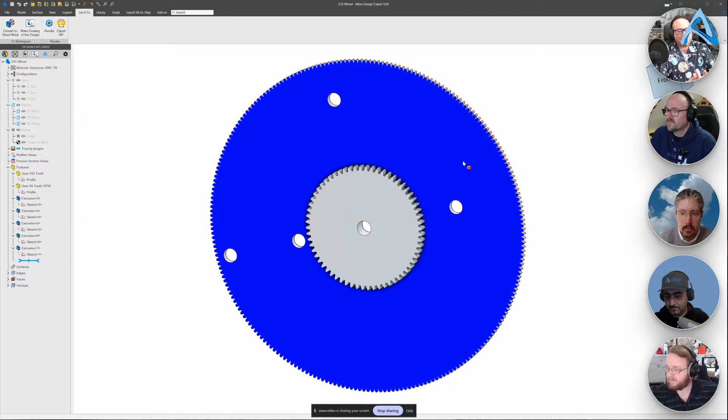Now, I had an issue in the last stream because right as we were closing down, a perfectly beautiful question came in, and I was unable to have the time to answer it. I promised I would open the stream with this question. So I'm going to share my screen and we can run through it. Here I've got a gear, and the question was, how can I show weight in drawings?

So I'm going to send this over to a drawing. And as this opens up, the weight may come in an unlikely place. So I'm going to insert a view of my gear, and then we'll actually go to the bill of materials, and I'll insert a standard template. Now, it may seem kind of strange to have a bill of materials for one item, but stay with me here. If I double click on this, we can bring up our bill of materials editor.

Over here, I can right click and choose column and insert, or just go to add column. I'll hit this X and remove everything. Then when I go to my properties, under design properties, there I have my weight. So I can add that as a column, and it comes in beautifully. Then I can just add this, maybe implement it right into my bill of materials. I can also specify with a new name, maybe we'll add in kilograms or whatever your preferred unit is.

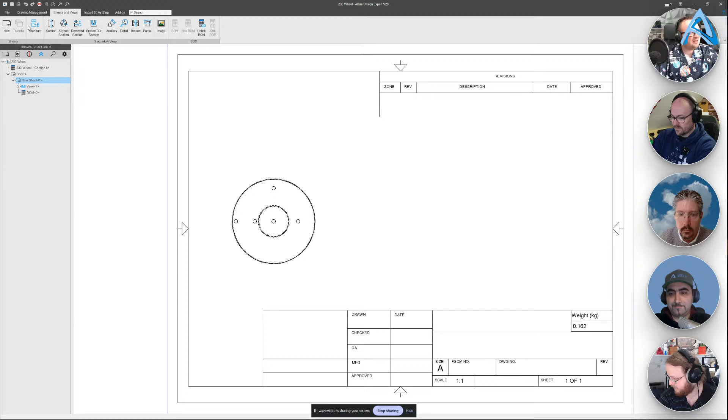Now the question is, what if I want to change something? So I'll go ahead and save this into my PDM, and then we'll say edit our 3D model. So if we need to change the material, right now we have 6061. I don't know, Chris, is that one of your favorite materials? It's not bad, it's easy to machine, that's for sure. Maybe we'll make a brass gear. If we apply that...

And save the changes, when we go back to our drawing environment here, I'll start reprojecting things, and sure enough, our weight updates. So we do have a linked updating weight. And actually, the Alibre logo is blocking my beautiful face here, so I'm going to get rid of that for a sec.

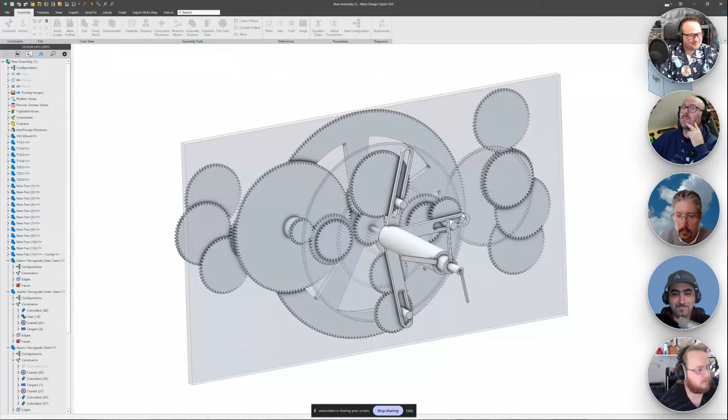What if we have an assembly and we want to do this? So just a few finer points for working in an assembly. I'll pull up my in-progress gear assembly. It's kind of half modeled right now, but you can get the idea. Lots of gears turning as we're loading this up. So have this interesting assembly. I'll go ahead and make sure that I send the most updated version to a drawing environment. How do we keep track of weights in assemblies?

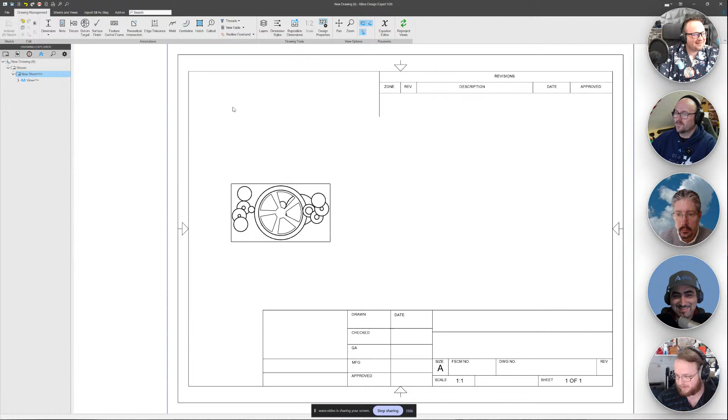That's awesome. Not to be a stickler, but if we're working in kilograms, is that not the mass of the part instead of the weight? I love it. Yep. Thank you very much, Adam. I could be completely wrong. I am out of date on my physics, but sounds about right to me. I'm way out of school. I've got zero knowledge now on anything.

I was in a previous conversation with Adam. He said he's not an engineer, right? But I think one of his ancestors is whispering in his ear right now. That is very correct, actually. And it's the same thing about pounds. If you want to be very strict about it, it's kilograms of force as weight, right? But if we're honest, when we call out the weight of a part, we use the wrong word. We want to specify the mass, right?

Yeah. Well, at least that's amazing. That's a comment that guys like me appreciate, Adam. Which is why we don't have many friends.

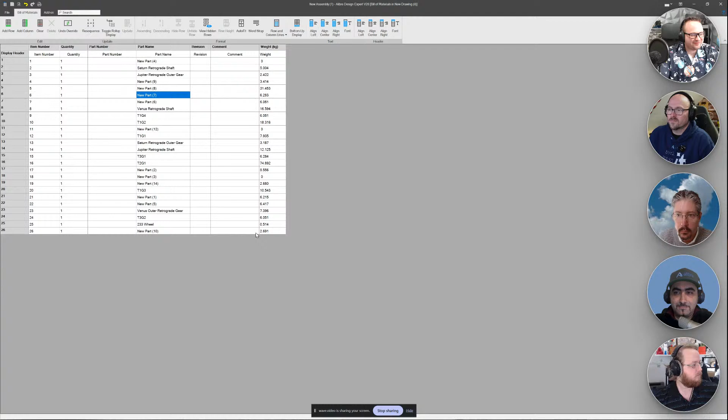So down here, I can right click, and under column, we'll add a summation row for that column. And there is the total weight of our assembly. So easy way to track things. These are updating properties, and sure makes things easy. So that is how we do weight, a little bit different than working through the custom properties like we typically might. So hopefully for the person who asked in the last live stream, that's a great solution.

I think this might be one to do a clip of and post it separately, maybe. Yes, I need to be doing that. I've had a lot of background projects stopping me from doing the videos, but we'll be getting into that too, because that would be a killer clip.

Yep. And can I just say here that this has already been covered by Joseph in an amazing series of videos he did on drawings. This methodology here, and if you need to output any sort of 2D drawing for your parts, you need to watch that series, because I think I knew some stuff and I learned quite a lot. So definitely value there. Well, thank you, Costas. I appreciate it.

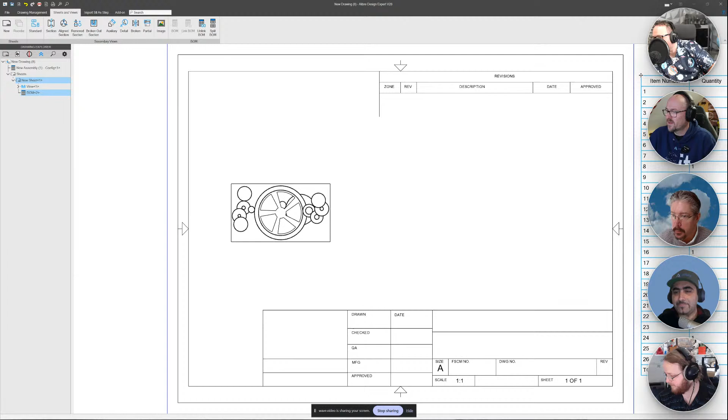What kind of support does EasyCam come with? Okay. Well, we do offer a maintenance program through Alibre where you get a year of support. In that support, you get custom videos as well. So when you have a project and you're getting stuck, we'll work a video around your project so you understand it. If you have two monitors, follow along with that.

I'm always posting something either on YouTube or Facebook. So there's a lot of videos. I'd say there's a couple hundred videos maybe out there. And now we're taking advantage of all those topical videos and placing them in AI. So if you have a question about anything about EasyCam or even Alibre, we added Alibre to the AI as well. So you're off to the races.

We do have PC to PC sharing. So you can log on to my computer, I can log on to your computer, and we'll interact that way real time. So if you have any questions on the phone, I can take over your computer and give you an excellent walkthrough. That's awesome. Thank you so much.

I've got another one here. How do you show center of mass on a part? I can take that one unless someone else is hungry for it. No, I know how to give you the actual location of it in the physical properties, but I don't know how to show it in the part if that's possible. So that's a really good one. Yeah, that's a great question. Thank you for asking it.

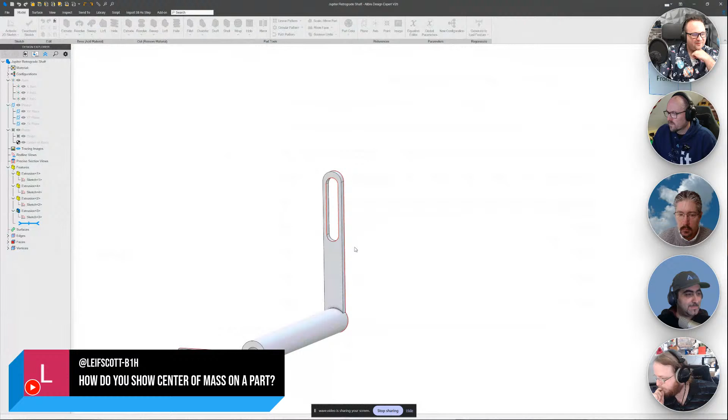I'll grab a kind of odd L-shaped part right here. So in our design properties, we have the center of mass. And I think you need to have the points showing. Oh, thanks, Costas. Yep. So there's our center of mass right there. Just be sure to show your points, folks. Nice and easy. That's a good one. So you can dimension it and all that. So that should work. What else have we got here?

Oh, here's a good one. Does EasyCam have post-processor capabilities to work with small Makera CNC machines? Okay, are we talking lathe or mill? Our post-processor library has hundreds of post-processors available, and they make excellent templates. And again, if we're relying on AI, what would take me hours to do, AI spits out in a minute, and we'll add what you ask it to add to the post-processor, remove it, or rebuild it for you automatically.

I've been developing post-processors for over 25 years now. So in most cases, I can deliver something based on the information that I receive. It can be a quick turnaround. We ask that you send us a sample program that runs your machine. Sometimes we require the manual. Some people take pictures if they don't have a PDF copy of the manual. So yeah, we support anything that has a servo motor attached to it. Maybe 5-axis positioning, not wrapping yet.

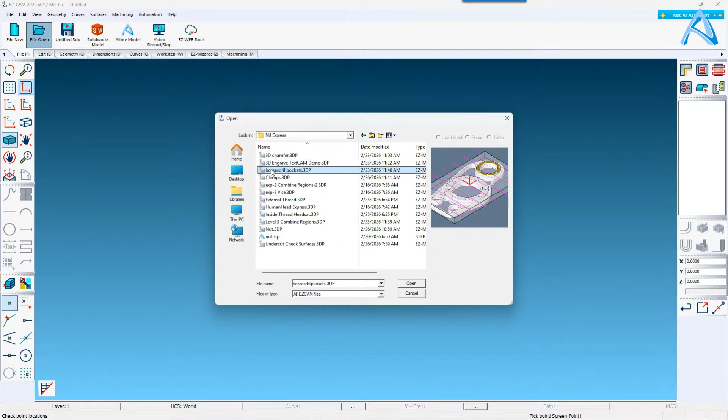Yes. Okay, so here we have our code. Let me process the operations. Oh, thank you.

I think I actually set this up in Alibre as I was learning the product. Beautiful. Alibre was just so intuitive. I'll tell you, I could jump on it. I mean, I'm not a professional by any stretch of the means, but I was able to follow it and make something like this pretty much the second day.

All right. So now we go to post process, right? And let's bring this box over. There you go. FANUC post processors. Oh my God. Okay, so I'm going to go to this. Yeah, they can be. So I'm going to go in here into the post processor itself.

Now look, this is our legacy code for building the post processor. You can see we're adding coolant here. We're adding speed and spindle direction. So this is basic. It's not very powerful. So I'm going to go into AI. Let's open up AI. Where did I put it?

Drag this over. Now that's my active post processor. Let's get this back over here. And I'm going to load it. There's load the post processor. Edit post processor is up at the top. And it automatically uploaded the CNC file, which is all the data, all in one file.

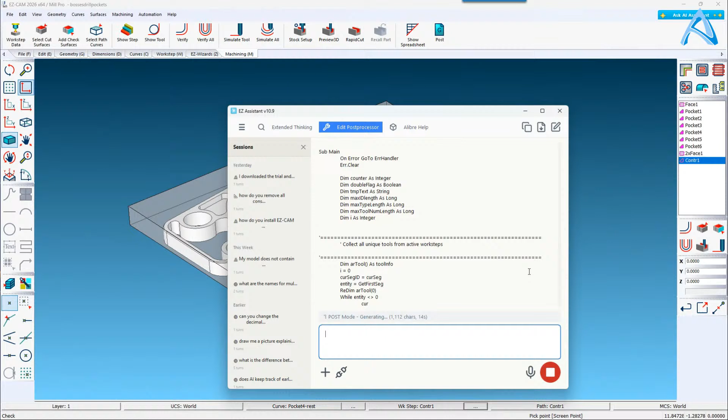Sure thing. CIMCO requires a setup of your stock. It requires tool lengths, tool diameters in order to get it right. So you would have to build a library. Well, in essence, what AI is doing for me is building all the background information that makes CIMCO simulation work. It's all being generated here.

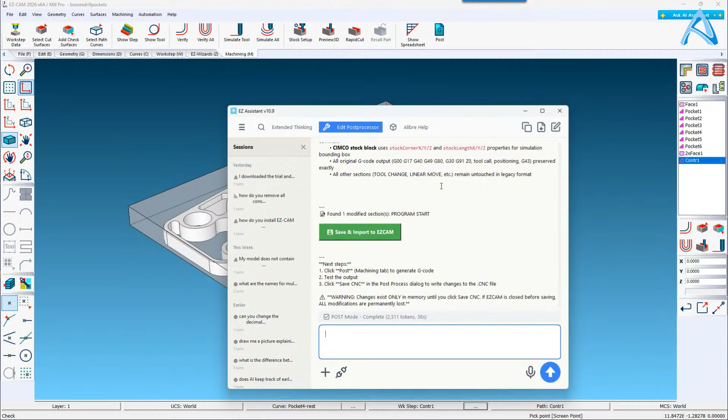Now we had the legacy code, and now we're building, it's called WinBasic. We're building basic code, and it says save and import to EZCAM. So I made all the changes. Oh, man, come on. Yeah, I know this would take me hours to do. So now we're going. Let's see. All right. Let's post it.

It's walking through my operations. Let me just drag CIMCO over onto the main screen here. Okay, so that was the legacy. I may have missed a step here. Let's see. Let me remove that. I apologize here.

That's okay. Doing everything live always gets you. Yeah, you know. Great new tool. I mean, this is recent. This is something that we just had developed. Our developer is outstanding. What he can do just blows my mind.

So let me get here in training, upload the FANUC post processor. I'm going to post it in regular code. And it's going through the strategies. I see that. Nice. Right. Okay. So pause.

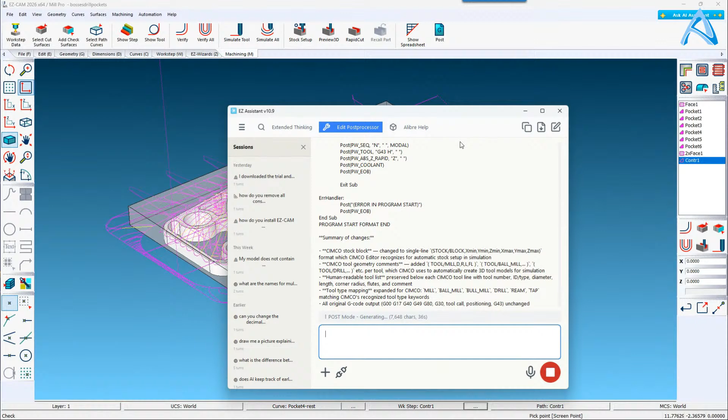So not only are you getting the answers that you're looking for in writing, but you're also going to visualize it as well. That's pretty cool. All right, so now we have save and import to EZCAM. It says one modification and the program start. So it changed just the program start. It's telling me it didn't do it anywhere else. And then we'll save it.

Yes. Now it tells me, it walks me through. So after that happened, it says click post to generate the G code to test the output. Then we click save CNC so it's permanent. So we'll go to post. Why is it not? We're selecting the correct post.

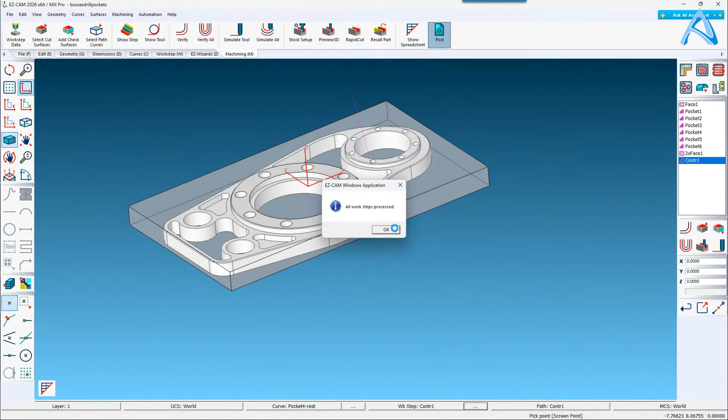And guys, this is the joys of CNC, right? This is pretty standard stuff. Now, anyone who doesn't miss a step here and there is not live. It should have been. But let me eliminate the other one. I apologize. This is just the joy of doing everything live. Right. 100%. Yep. Well, I did it just before we came on, and of course, the second time. What is it? Three times a charm here. Yeah. Hopefully that's not the case. Every machine shop goes through this. So. Yep.

Let me just clear the conversation. Post mode. I'm on post editor mode. This sends up and attaches the current post processor from EZ-CAM.

Now, Chris, I've got a few other questions I can hit if you want to work on this in the background. Yeah, please. Why don't we do that to keep a nice even flow, and then I'll just go, Yahoo! We did it. First try. Well, that's a great one. Yes, this one is a little bit less asked about, but I really wanted to get to it if I can find it here. It's about educational licenses. Let me hunt down in the comments. I just saw it. Right here, I got it. Thanks, Adam. Adam's the hero that saves us all.

Do you have any plans to offer education-based licenses, college and K through 12? I think if you're looking for something big, contact help@libre.com and hello@libre.com. Send an email there if you're a school. We also have $100 for Pro and $200 for Expert with a valid student ID. So keep that in mind if you are in the educational sphere.

I also have one. Will AI be part of a permanent license, or do you have to be under maintenance to make use of that? I think that's for EZ-CAM, when you have a second, Chris. Oh, what was the question again? I'm working through this. Will AI be part of a permanent license, or do you have to be under maintenance to make use of it? No, it's going to be available to those that are trying the software. Perfect. We don't want to leave anybody in the dark.

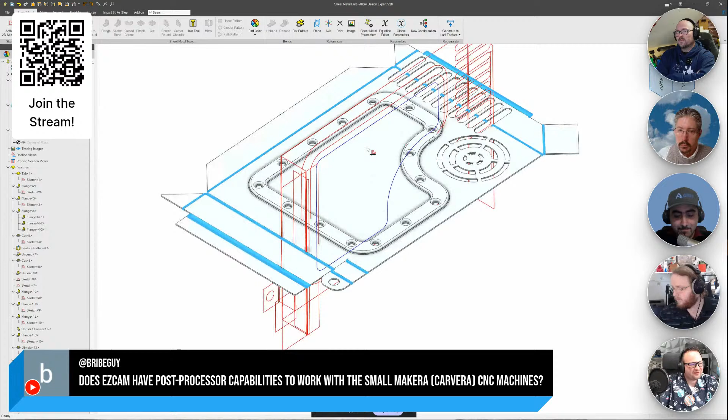So we have a flat pattern that we can flatten out, and then you'll see that our stamped area stays, because generally when you do something forming, you do that first and then cut out your blank for sheet metal bending. But how do we calculate the lengths? Because different materials are going to have different bends and stretching when you go to bend things. So we use K factor.

Let's go with adding a flange here. Now, when I go to add this flange, I can go to advanced over here and see that we have K factor, and we have a built-in K factor value for whatever material that we want to use. Under bend allowance options here, we also have unfold lengths, so we can set it that way as well.

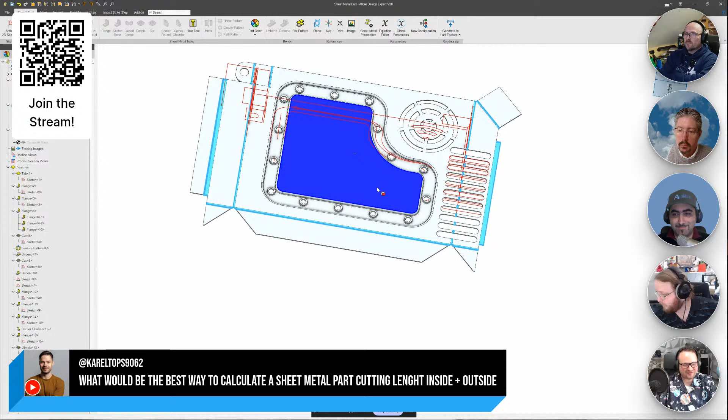But then when we go to flatten things out, those bends and stretches are built into our flat pattern, and that would be the approach that I'd say we use to calculate sheet metal part cutting lengths. Hopefully that answers the question. I haven't been a career sheet metal guy. I've only used it a few times in the field, so maybe there's more to that question, but that would be my short answer on that. Let me know if I hit it or not.

I'll second the comment. There's nothing AI about Steve's channel. In fact, I've watched him fix headphones live on the air. That was my favorite live stream moment, because I'm sitting there going, there's no way Steve can fix that circuit board on those headphones, and it worked. And I think you're wearing them right now. So look at that. There you go. But wait a minute. How do we know that Steve is even real? Is he not too good to be true? Maybe he's AI. Sometimes, yep. Sometimes I get into an explanation and Steve says, but what does that mean for a beginner? And I'm like, oh, I'm so glad Steve asked that, because it's easy to get into the fast.

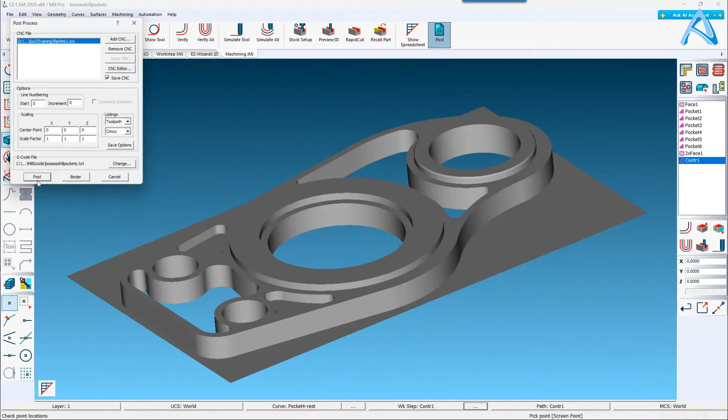Because CIMCO can do some really decent simulation if you have all the data, and doing a post processor that gives the data to CIMCO was a very interesting idea that I hadn't thought of back in the day, and I should have.

Just opening CIMCO now. Then what we're going to do is go to the backplot.

This is so useful, guys. So here's the wireframe. Even that is extremely useful if you know what you're looking for and how to read it.

And if we didn't have the post processor developed for that, you would have to go into your tool setup. Which means making your tool libraries twice, which is not practical, right?

Let me just simulate the stock here. Add stock.

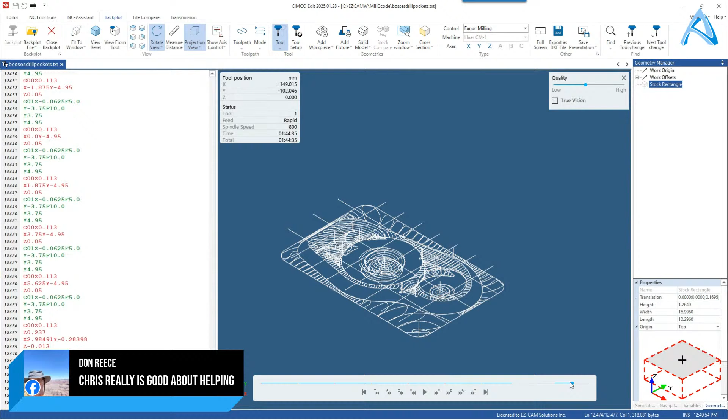And a special thanks to Don Reece. I love that comment, I'll show it one more time. Chris is really good about helping, and I always get quick responses from Chris.

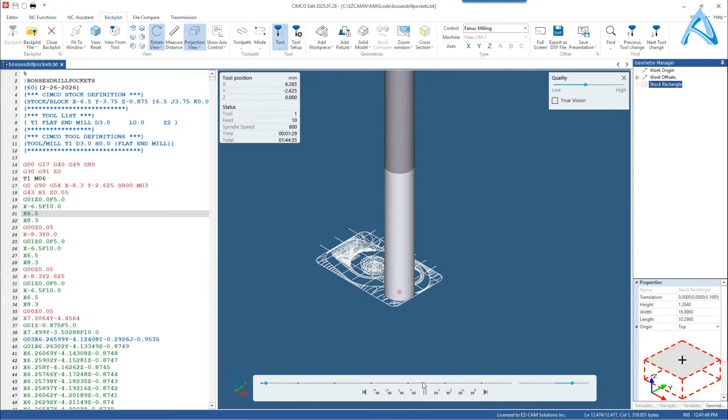Yeah, but isn't it like that? Isn't it amazing that it is like that? It's so paradoxical that those skills to not know what you're talking about is also correlated with competence. It comes back to bite you, doesn't it? Anyway.

The first thing I learn is where do I not put my hand. Next to the big spinny thing that's eating the metal or wood is probably a good start. Start at the basics, you have to bear with me.

If I'm very honest, I don't remember how to set up the stock on CIMCO either. I think if you go to add dimensions, you can give it some dimensions for the stock, but it was supposed to get that out of EZ-CAM. So my fault might be that I have the stock set wrong. Let me go back through it.

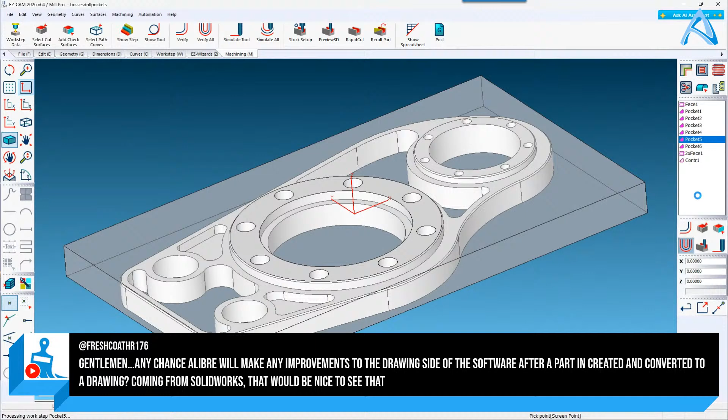As you're going through that, I'll bring up one question that looks pretty good here. Any chance Alibre will make any improvements to the drawing side of the software after the part is created and converted to a drawing? Coming from SolidWorks, that'd be really nice to see.

Yes, I've tracked a lot of drawing requests on the forums as well, and I'd like to see that. I think in V27 or V28 we had some enhancements that were highly requested, and we always want to keep improving that. So don't feel shy about submitting an enhancement request from the home screen of Alibre, and we can get that taken care of for you.

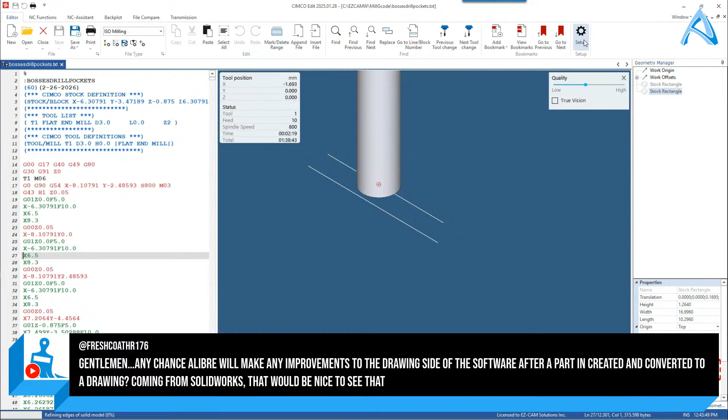Remember, the biggest thing with an enhancement request is to tell them why you want the feature as well, because that perspective helps them add the feature. Adding features without knowing why you want it can sometimes be a bit of a blind battle. They want to know why so they can make it that much better for you. So when you submit a feature request, say this is what I'm looking for and why, this is why I need this feature to use the software.

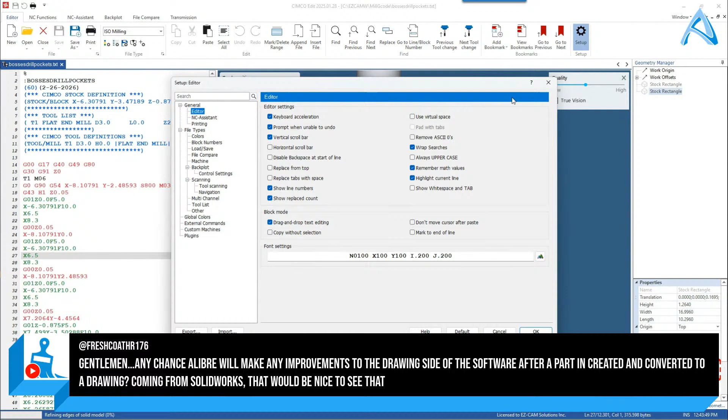Why it helps you - like Max has gone with importing STLs and things. Importing STLs can be used for tons of different reasons. Thanks, Adam, that's a great point, because if we can know, do you want to import an STL just to measure around it, or do you want to import an STL because you want to modify it? Those are two different cases and two different timelines for implementation, and maybe we can get some useful features out.

It's worth mentioning feature requests, because maybe they do add some drawing features and it's not what this guy's looking for or how he wants to use it. Now, Chris, I think I took enough of your time, sorry Chris. I was just saying I quite like the drawing environment in Alibre as it is, but if anybody has got any ideas on how to make it better, by all means.

Sorry, Chris. Sorry, that's not even an EZ-CAM question. I asked, I got a bit carried away, if I'm honest. But yeah,

I remember that it's pretty easy to actually get a block going, but then you need to locate it in CIMCO. So yeah, I'll have to figure that one out. I'm sure it's just something simple.

On EZ-CAM, is it possible to run a Swiss with a thread whirling tool? I'm pretty sure that means a Swiss screw machine. Well, we can support sub spindles, 2 turrets, without the wait codes - that would just have to be manually inserted into the program. We can support B-axis, Y-axis, C-axis, and of course, I'm trying to think of the sub spindle, what that coordinate system would be, but we support, like I said, 2 spindles, 2 turrets, Y-axis and B-axis support. So beyond that, I'm going to have to say not more than that.

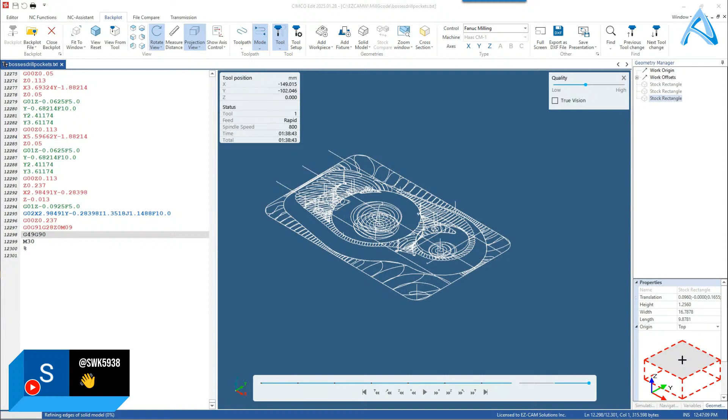So this is another nice question about EZ-CAM - which version would be required for 3 and 4 axis CNC mill work? For 3 and 4 axis CNC work, you're going to want the EZ-Mill or the EZ-Mill Pro. The 3D depends on how complex - if you're dealing with a lot of filleted complex molds, then you're going to want the Pro. You can always start off with the Mill, and within your 1-year support and maintenance, you can pay the difference to get the Pro. The EZ-Mill will support both wrapping and 4-axis wrapping and indexing, so you're covered there. The EZ-Mill Pro goes a little bit further - you can actually machine 3D surfaces on some wrapping.

That's very interesting because we were discussing Fusion, right? And Fusion took their sweet time doing 4-axis anything, and once they made it and had it working, they put it behind a $2,000 a year paywall. So if EZ-Mill Standard can do 4-axis wrapping, that's awesome in my book.

I've been able to cut a decorative post where it was a vine with grapevines, and it would do the rotation and do the corkscrew effect - it would just go through and machine the post. A lot of woodworkers buy our software, and that's one of the types of projects they have. Let's also mention, if people don't know it, that the vanes in a gas turbine - either a power station gas turbine or a jet engine - those little vanes put on the hub are actually 4-axis mill work, not 5 like many people think. They are polished later, of course, but 4-axis wrapping can do some pretty complex stuff. Yep, for sure.

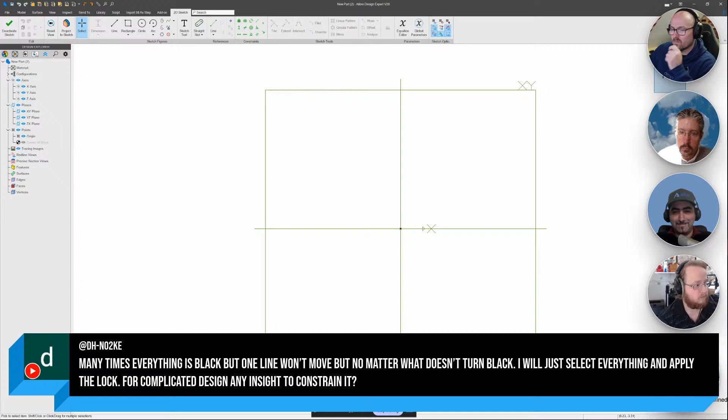And that is an awesome question. So when I make a sketch, it really is about the sketch solver here in my lower right. I better hide that comment so that you can see. In my lower right, I get a little magnitude, position undefined, magnitude defined, position undefined, and fully defined. So we'll go through what those colors mean.

Here, if I make a rectangle and give this a length, this turns orange, as well as this one, because we now know the length. So magnitude is defined, but we don't know the position. I can move this line around, but no matter what I do, the length of the line does not change. Now, if I start adding some dimensions - and this isn't necessarily the best practice of how to dimension something - just to show, this line now turns black because we know where that line belongs and we know how long it must be. And so I think our user is asking...

Sometimes everything is defined, but something doesn't turn black. That happened to me back when I was a career SolidWorks user. It's happened in FreeCAD, Onshape, just about anything I use. This is down to a sketch solver. There are algorithms that determine what the degrees of freedom of sketches are. Sometimes a sketch is applied in a way that is correct, but the algorithm kind of fights it, and so something may not appear fully black.

Often, if I know that my sketch is fully defined, I just ignore it because I know that it's the dimension that I want, and move on. Sometimes, if I really need to troubleshoot something, I can delete some constraints and constrain it in a different way. For example, in this case, maybe instead of having this one right here, I can delete that, or I can delete a vertical and then try to use different constraints to get the same solution. Almost always that clears it, but it is kind of a back-end algorithm, and all platforms have this. It's not a unique thing.

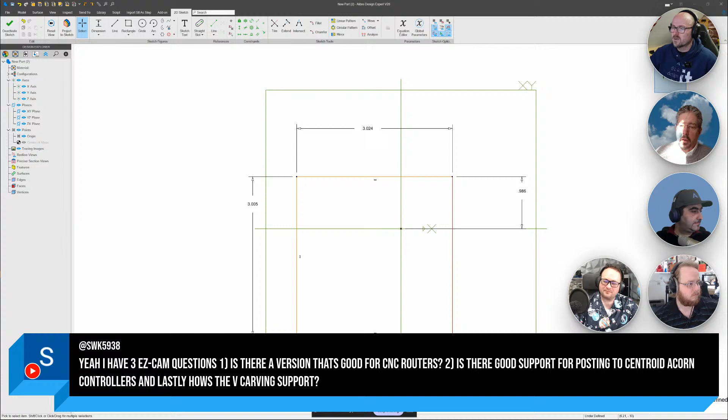Is there a version of EZ-CAM that is good for routers? I'm guessing that's probably more a post-processor question than anything else. Would you say that's fair, Christopher? So with the Centroid, we already have the post processor for the Acorn, and with routers, we support routers all throughout the world, and there won't be any issues. But the version of product that you need, the Mill Express handles some 3D machining.

You don't get a nice uniform toolpath, so sometimes you would have to create and combine strategies. So it's going to take longer to produce the part for a good finish, but you can achieve it in the Express. And the Mill has a wizard that goes along with it, making it easier to walk through. It also has some advanced toolpath for you, not as powerful as the Pro.

The Mill Pro offers, so you know the difference, plunge milling. So if you're going to hog out a lot of material fast, you would use plunge milling. It has pencil milling, it has re-roughing. So if you go in there with a large tool and you want to go back in and get those corners, you don't want to have to manually set those boundaries, going back to curves in order to do that. Exactly. So Mill Pro calculates all of that for you.

It offers a nice uniform step over with our equidistant, so that it doesn't matter what surface slope - if it's a vertical wall, it's going to give you a uniform toolpath throughout. So it's not like the projected toolpath, where with pocketing you get a step over, and coming up against a vertical wall, or let's say there was a slight taper to it - when you step over that 1/4 of an inch, you could miss the surface completely.

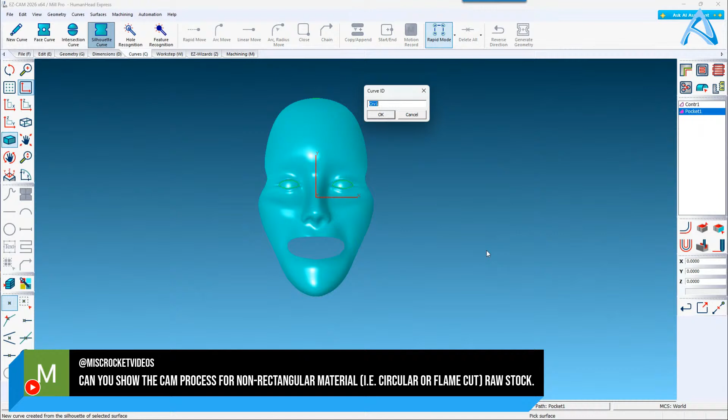Well, that's cool, actually. And that was just a silhouette boundary curve. So let me delete the curves, and I'll get to the question right away. Your curves, silhouette boundary curve. My other screen has the... What am I getting? I'm locked out here. Maybe my main screen had the command menu. All right, so silhouette boundary.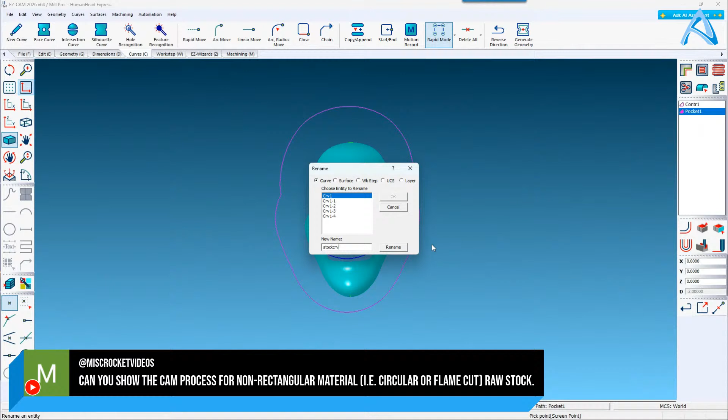Oh man, that's cool. Now let's say I want to offset that and make that custom stock. Then what I can do is I can go in curves, offset. Let's give it a distance. Wrong direction. So we'll give that a name. Edit, rename. I should have named it when I made the curve. And this is going to be stock CRV. Rename. Then I'm going to give it some toolpath.

Let me just go back to that silhouette boundary curve again. Contour, half-inch, multiple passes, stock allowance 0. Total stock, let's say there was 1.25 inches. Cut step, with a half-inch cutter, we'll step in maybe every 200 thousandths.

Now we're going to make that the stock. So if we take a look at the stock as we have it now, rectangular block of stock, go in stock setup, and I just change this to custom stock. And what it's doing is it's looking for the name stock CRV, and it will give me the shape. As you can see, our stock shape. And you can do that with a solid model as well. A solid model can be any shape, and it can be imported into EZ-CAM as an STL file, and you can do the same thing.

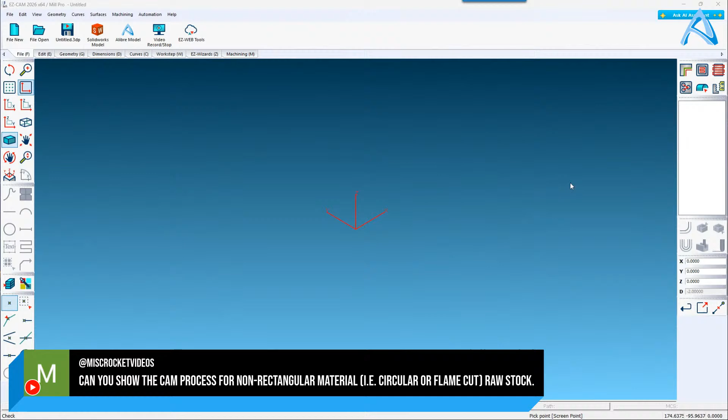Let me do that. I have an example from Alibre. What's this? Oh, Pro. I think my sharing button got in the way. This is a good example of our relationship with Alibre. So here I have some suppressed faces. Yeah, okay. So that'd be my stock, so I would want to machine what's underneath it.

So I'm going to go over to our add-on, EZ-CAM Sync. Really cool. I'm going to transfer this. You can transfer it as a part if that's what you're going to machine. I'm going to transfer this as stock, and that comes in as a white model or see-through. Then we come into Alibre again, we'll suppress these features.

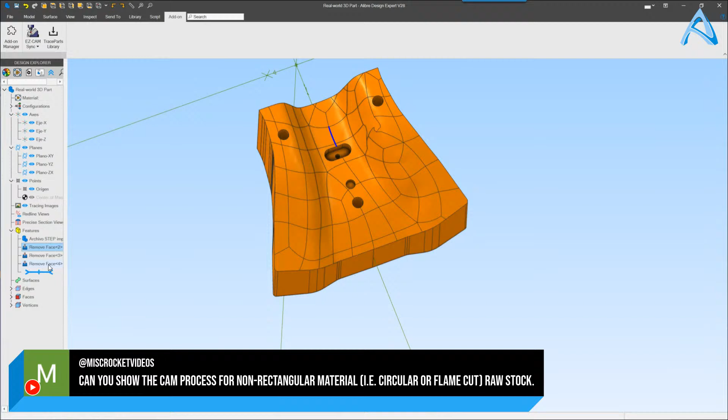I moved it out of the order. Come on, there we go. All right, there we go. I wanted that. I'm sorry. Suppress them. Okay, now we go over here to sync. Transfer as part. You see, we've capped our holes and complex surfaces.

Now we'll add 3D machining toolpath to it. Let's see, so finishing, equidistant offset, ball end mill. Yeah, we'll go with 12. Step over. I'll have a large step over so there's less time to calculate.

I want to interrupt it just a second here. I'm going to give it a negative finish allowance, so we're going to actually see it go in and cut. This is what I was talking to you about, Joseph. It takes a little while for these things to calculate. That's all right. Oh yeah, for sure.

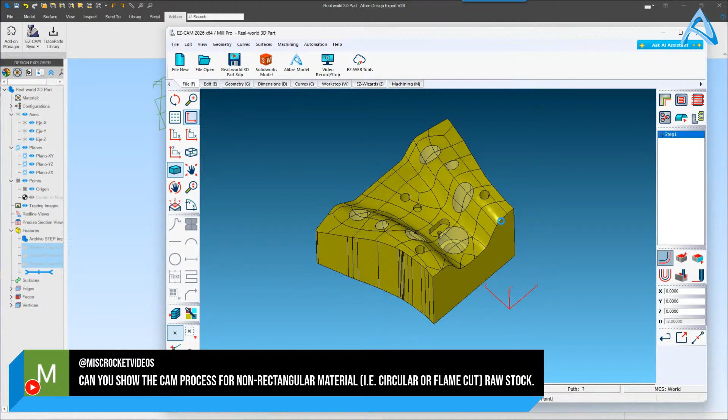Here's an interesting question that's come up: why should the lock constraint be avoided? Yep, I just answered that in chat, but let's discuss it as well. First of all, the lock constraint is applied to specific sketch elements, the ones you select. If you select everything, it applies to everything. But a lock constraint goes onto every single different sketch element that you have selected.

And because of the parametric nature of Alibre and how the sketch is handled, when you constrain a single sketch element, it has far-reaching implications. It might constrain some degrees of freedom of the elements around it. It might constrain an element all the way on the other side of the sketch, depending on how you've set it up and what design intent you had going in.

Basically, you avoid it for two reasons. First, you negate any parametric capabilities that Alibre gives you, and second, it is very, very easy for the lock constraint to have an effect you are not anticipating. That's what I would say. Of course, there are times that you need to use it.

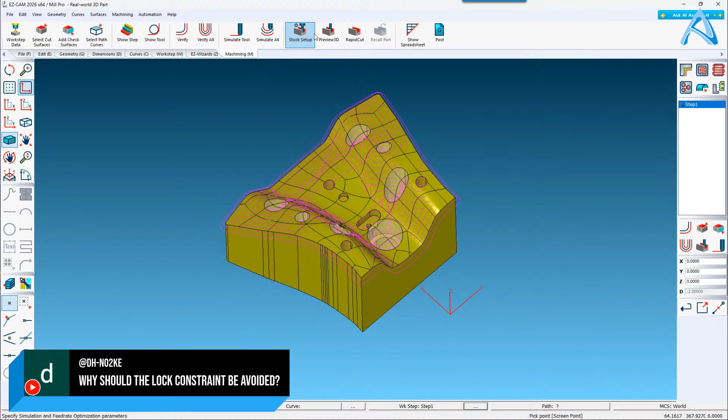I'm ready when you guys are. All right, I just had to switch to our faces to make sure we were communicating well. Can you all hear Steve? Yep, I can hear him fine.

Cool. One of the reasons I use the lock is if I'm projecting from a piece of geometry and that needs to be trimmed or altered. When you keep the constraints from the model, it doesn't allow you to trim, in my experience. I'm not sure if that's just the nature of it or if I'm doing something wrong. So I'll apply a lock and sketch around things so that as I'm dimensioning other elements, the line I'm projecting doesn't move. Then I'll remove the lock, trim, and do all the bits and pieces I need. So I jest when I talk about using the lock.

That's actually okay. Steve is showing why he's a genius, but that's a great use of the lock constraint, like a temporary lock. I like that. Yeah, that's a good lesson. Never underestimate Steve. I've been living that one for a while.

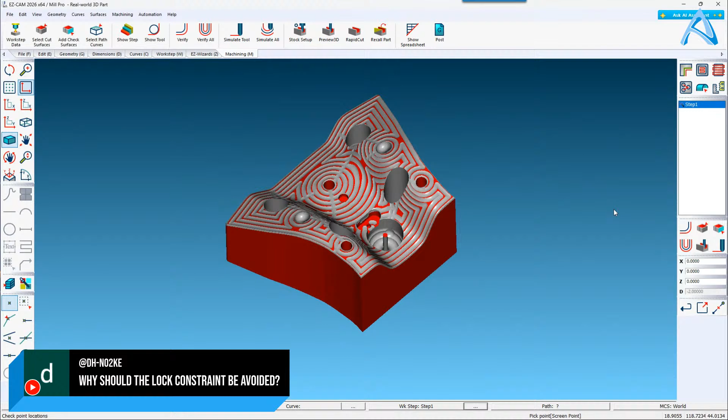Anyway, Chris, you're showing us this carve. Yeah, that simulation was really cool. Here was a good example of transferring the part from Alibre as a stock, and then we're cutting into the model. It's just a rough example, but sometimes when you get something heat treated, you've got to remove just a very little amount of material. So this is a good example of that.

And on that note, Chris, most tool steels: you machine, you pre-finish, you harden, and then you do the final finishing on the hard material, because you need to take out any warp the hardening did. So that's an excellent use for what you just showed. It's really cool. Thank you.

If that's it for that question, I think we've got a few rapid ones for you. Sure. What is the price level on EZ-CAM? Joseph, would you be able to answer that on the Alibre site? Because when you bundle packages, it's different than what we deal with. So we'll jump to my screen here now.

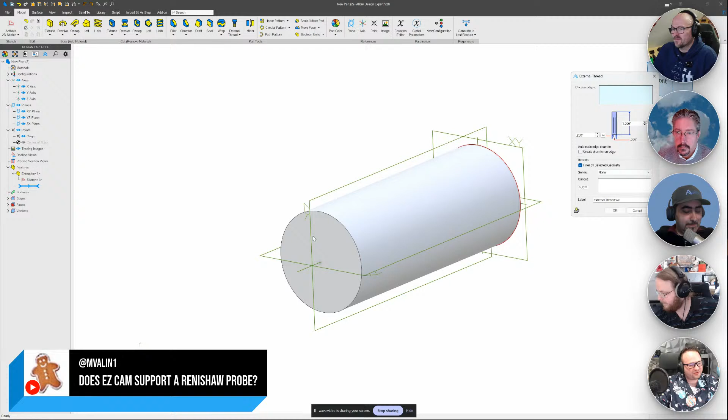So I'll go with an external thread here. When we pull up our thread tool, we have some built-in things here. So I choose a circular edge there. We'll jump into Acme stub, which we were talking about. And then, depending on what you want by blunt start, we have the chamfer right here, so we can automatically chamfer the edge. Not fully a blunt start, though. So if you're going for just quick and easy model threads, I would suggest Acme stub with a chamfer. Otherwise, it's kind of down to making your own blunt start yourself if a chamfer isn't good enough.

I want to look into doing that, so let me put that on my video list. I know someone asked me earlier about our upload schedule, so I need to get a video out anyway. So we'll add a way to do blunt start, because blunt start is a little bit different than a chamfer, but if you're happy with a chamfer, that's how you do it, quick and easy.

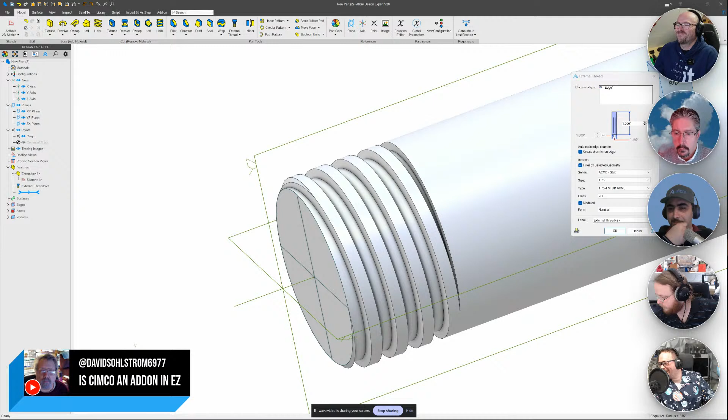What version of EZ-CAM? Oh, have you got one? I was just going to really quick, because I'm not sure.

Yeah, this guy says, are there constraints missing in Alibre which other CAD programs have that we're thinking of adding? I have only ever used Onshape other than Alibre, and I haven't noticed anything missing compared to Onshape. Of course, when I first used Onshape, I did not have all that much experience. With all that being said, and I'm not trying to toot Alibre's horn, but I think Alibre has quite a bit more features than Onshape does, at least built in.

Onshape relies a lot on community-related features. But as far as constraints in particular, I haven't noticed anything, but maybe that's one for Kostas, who's used a lot more software than I have. Yeah. So if we want to be very precise here, I would say that Alibre has one constraint in the sketch environment that I've never seen in any other CAD system, and that's the second way to use the midpoint constraint, which is with 3 points.

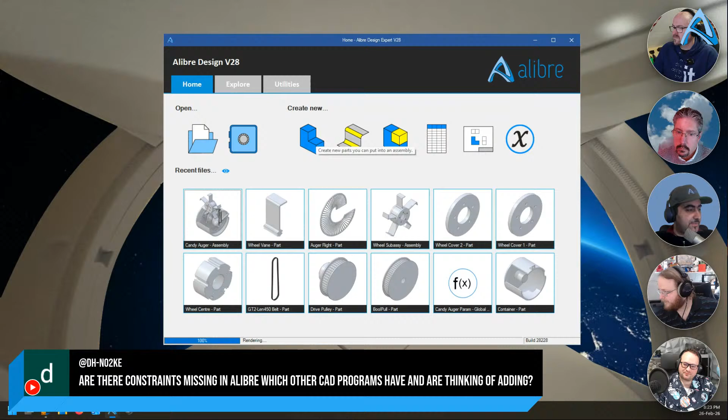And I don't know if you want to switch to my screen, Joseph, where I can do a quick demonstration of that. So you can use the midpoint constraint in Alibre also with 3 points. And how does that work, right? So let's say we've got a line here, and I made it crooked on purpose. I'll use the midpoint constraint, and now I'll click on this point, I'll click on this point, and then I'll click on the origin.

And you'll see what I've done now. So basically the first 2 points that you click on define a linear segment. Of course, here it is already a linear segment. It can be anything, right? It can be projected points. And the third point you click on forces the system to keep that third point on the perpendicular bisector of that linear segment that the first two define, right?

So you see it here. It doesn't become the midpoint, right? But it is forced to remain on the perpendicular bisector of that linear segment. So I haven't seen that in any other CAD system. And once you get used to it, you use it a lot. It saved me a couple of dimensions in complex projects, for example, right? And that's really cool.

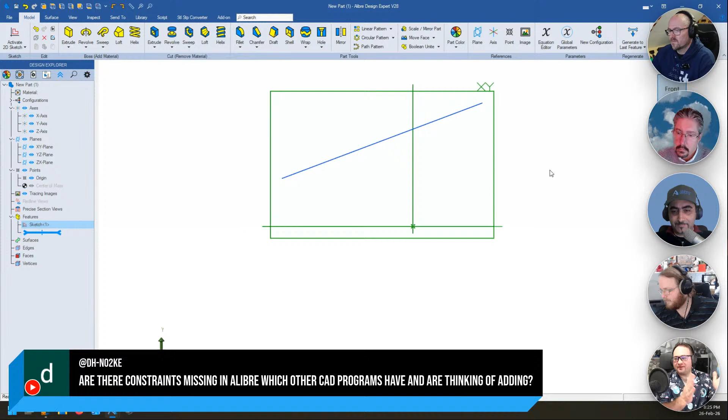One constraint that I hear about a lot, and that's really high up on my list in an assembly, is the midpoint plane constraint. Yeah, that's what I meant. Oh, okay. I didn't say it correctly, maybe. Yeah, exactly. Okay, I'm with you. Awesome. Thank you so much, Kostas.

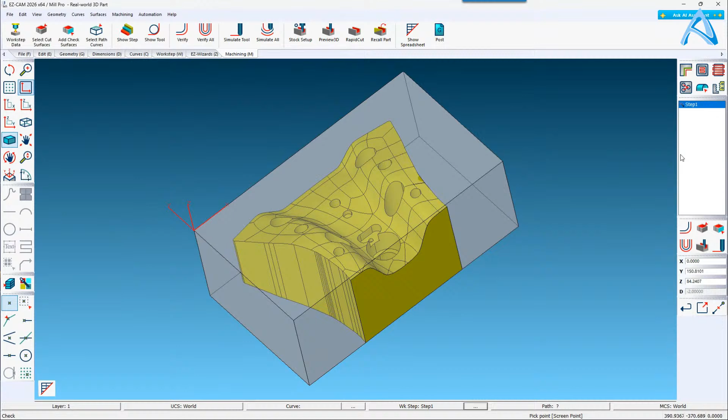So if I go with 300 and pick the upper left-hand corner, you have world on stock. So with the coordinate system, you're touching off your tools on the material versus having it established for the part. You've seen that there was stock set up through Alibre, the custom curve under stock setup. There's also accommodations for cylinders, like 4-axis cylinder around X, cylinder around Y. But we do have the cylinder around Z axis. And if I hit auto setup, it gives me the diameter. Let's see. Let me make something simple here.

Turn this off. And preview. There's our cylindrical stock. It was wrapped up based on the size of the block itself. So if you have round stock, you're going to want to go to the stock setup if you're not going to

customize your stock. But yeah, in EZ-CAM, you have either a block of stock, round stock, or you go through your custom stocks. And that would be something you'd build, preferably through Alibre.

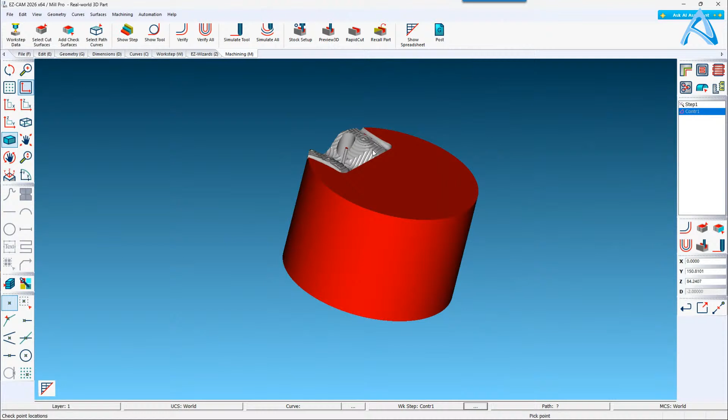So Bill Black, I'm late. Was I supposed to bring the tacos? Yes. In fact, the stream crashed due to a lack of tacos. I'm hungry again. Yes. Again. I mean, Bill, you should have an alarm set by now. You know, right around this time you bring the tacos. Maybe that's why the stream's crashing every time. At least Taco Bell. Something.

I'm seeing one. How does the toolbox in EZ-CAM look? That's a nice one. Toolbox in EZ-CAM. Okay, yeah, that's a fantastic tool. You can convert metric to inch, geometry to metric in just a click of a mouse. You can pick curves of the current work step, so they can be added to another work step.

We have set the drill diameter for the current work step, so we take care of that now. The drill diameter, that's probably old school. There's a button right here where it's sized up to a drill. Matter of fact, with the tool diameter, that can be sized up to any corner radius. So if I were to click enter, this should give me

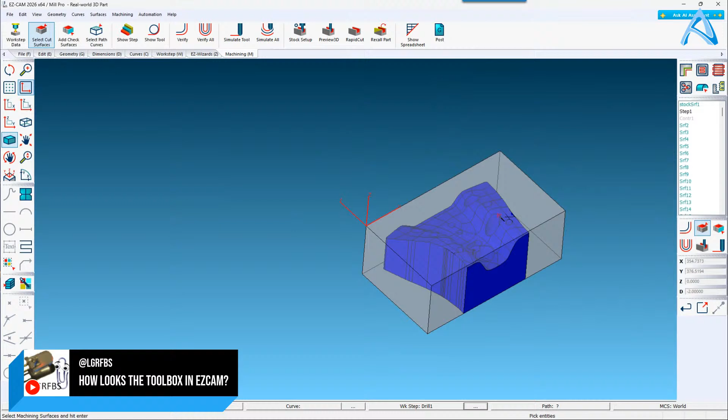let's go to a drilled hole. Let's go here. That guy right there. And enter. Calculate. And it gives you the diameter. So in the toolbox, that's not really required any longer.

Set first feed. So a lot of times when you have your first feed in a pocket, if you have a value set there, when it starts in the center, it knows that it's cutting with more material. The whole diameter is going through the material, so you want to use a slower feed. Some instances, you just don't want that. You can set it to 0 here automatically. Create geometry from curves, old school. Max feed rate, actually. This one is important.

So where you have high-speed machining and there's a return pass. So if you're cutting one way and not zigzagging across, if you're always climb milling, at the end of the pass, at the end of the sweep, it wants to rapid back to the next position to start the sweep all over again. Well, it's not a rapid move. It's actually the highest feed rate your machine supports. Or you can cut it down if you want to. You don't have to go at full feed rate.

So this here will take the active post processor, like we did with the CIMCO. It made the tool list for us in the stock. This is going to update your post processor to the feed that you want to use as a rapid. So that's kind of behind the scenes. So that's where high-speed machining comes in play.

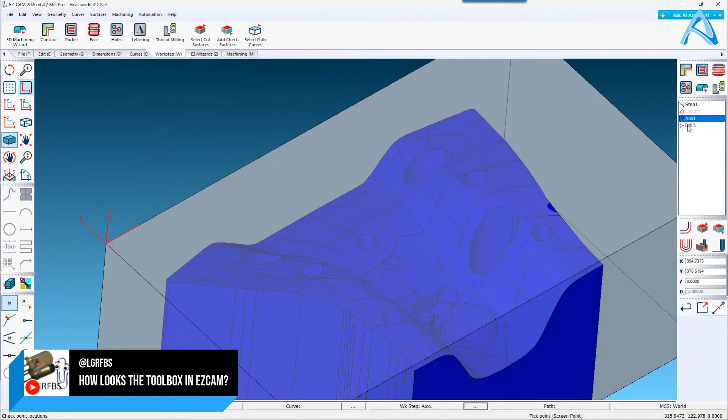So if I want to separate, you can make the entire program when you go to post your code, but when it hits the auxiliary function, it's going to throw an M00 in there if you set up the post processor that way. So this is just an auxiliary function, is just our way of throwing in any amount of code necessary in between operations. That's really a nice tool, but I don't see it getting used enough.

I haven't had that many requests for post processors. But this would be like I was saying, to make a program for a probing cycle, setting up boundaries or what have you. I'm not too familiar with it, but anywhere that auxiliary function is located is where it's going to insert custom code.

So that could even potentially be a dual spindle handoff. I mean, we do have, well, in the turn, we do have a handoff. You do have that. Oh, okay. It is built right into it. Great, actually. Okay, that's actually cool. I'm telling you, for that $2,000, you're getting a lot of bang for your buck. I mean, yeah, exactly. Yep. There you go.

Absolutely. I mean, this is good for the AI. Let's see. So that's post processor stuff again. Yeah. Let's see.

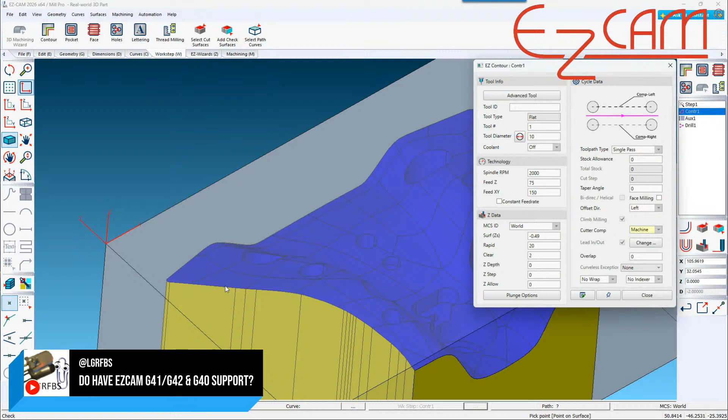So let's say I have it on left and cutter comp. If it's on software, there is no G41, G42. You can't adjust it at the machine. But if you choose machine, EZ-CAM centers puts the G code on center line. So your path, let's say I was machining the outside edge of this part. If I have machine set, the G code is actually centered on the path, on the outline of the stock.

So in your machine, you have to put in either your diameter. Some machines require a radius, so it's based on whatever your control is configured for. If you choose both, EZ-CAM offsets for the radius of the tool, so the tool is outside the model, and you can put in a wear value in your machine register.

Typically, this with both is most commonly used with G40, G41. So your tool register has is 0 diameter. And then if you want to make a tweak, you go in and maybe adjust it by a -1,000th or a +1,000th to stay away. So yeah, that's either

G41 and G42, guys, is like a complete must for finishing strategies as far as I'm concerned, especially if you have like a 2D curve finishing strategy. You always do G41, G42, depending on whether you're climb or conventional cutting, because you can get your tolerances dialed in on the machine, just like Chris said, instead of needing to post programs again.

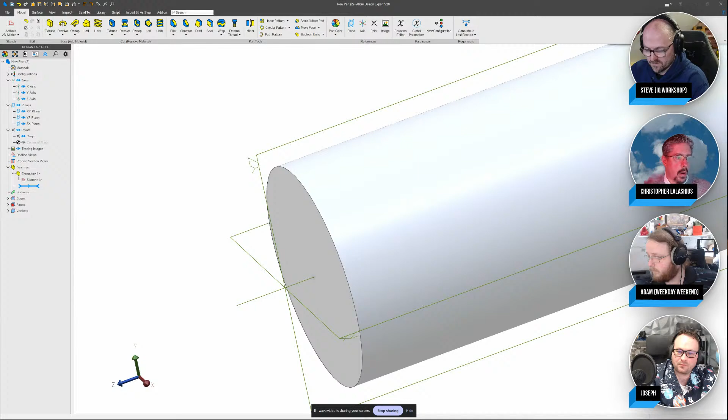Now, okay, so AI had finished what it was saying, and let's just see. See how cutter comp works in EZ-CAM, basically going over what I've just described. I'm just looking for certain things. I want it to output something for me, and so let's hope it does.

Quite a bit of detail, doesn't it? Yeah, you can also save it to PDF, and you can copy it. So if you want to save it to a PDF and keep your questions listed, that's one way of organizing. So when somebody sends me a question in email, I just copy and paste it in here, and I get the answer, and I send them over a copy or a PDF file. There you go.

Yeah, it's telling me a little bit more than what, yeah. The last thing it said, it took me a while. It bit me quite hard on one of my first jobs, that FANUC only activates it on a linear move. Oh, you know what? I'm in the wrong, I'm in post-processor mode here. So.

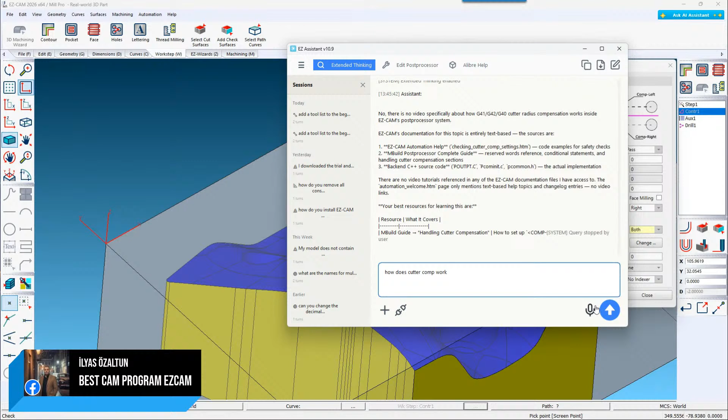A little bit of feedback for you, Chris. They're saying that's an excellent demonstration of the raw stock method and the Alibre transfer methodology, very practical to achieve. So nice work. Thank you. You can also throw in a fixture if you needed to.

Well, this thing's thinking, why don't I just go ahead and show you that. And I thought I saw that you can insert your model from Alibre as a fixture, correct? Yes, that's exactly right. I want to show you an example of that, it's so powerful.

So you can have the table as a fixture, all of your clamps, the posts. I opened it on top. This is another thing that people might get hung up on, and this is as intended. You have your model open, and then you go to File, Open. Whatever you open is going to overlay on top of the model itself. So you want to be sure, if you're going to open a file, am I opening it for clamps or fixtures? Do I want to add that to the open document? And here I did not.

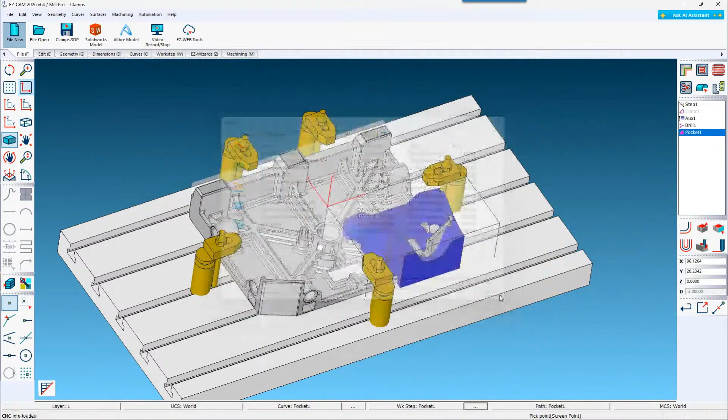So to show you real quick how this works, let me delete that one. I'm going to go to Pocket, select this face, verify it. Okay, so if we look at a top view, you can clearly see we're going to crash our part, or our fixture rather.

Yep, then I go to what they call check surfaces. I want to check up against these two faces, or you can include the whole clamp if you'd like. Verify again. And you can see the modified toolpath, it's not going to violate the clamp.

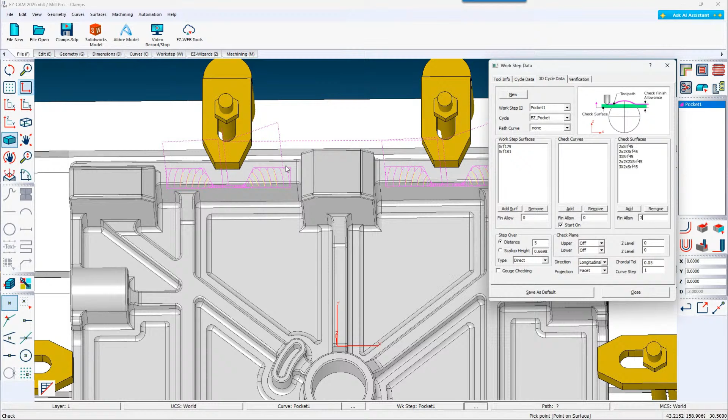That's now cool. If I go in the background, come over to 3D cycle data, these are my check surfaces, those are my clamps. And if I add an allowance, let me see what 3 millimeters is going to look like. So you can see the center line of the toolpath, that's what this is. And also, this is the high feed return for the next pass.

So let's verify that. You can see now it's farther away from the clamp itself. So these check surfaces, we have more control. That's something new, I think it might have been introduced in the last version. So if you guys aren't up to date, I recommend you do that. Thought I'd throw that out there. Okay.

Hey, thanks Chris, I like this feedback, I'm really liking it. Yeah, I wanted to highlight that comment as well, Joseph. Yeah, good feedback from a user. Easy is a good option with the 4th axis.

Yeah, the personal license is somewhat nerfed in Fusion 360, and you're only able to use 3-axis CNC in there. Plus you've also got all sorts of restrictions on the types of file formats that you can import and output from Fusion. So 100%.

But you know what, Steve? It's not just, okay, you have the personal license and it's nerfed. What infuriated me, because when I started my company, I did start it with Fusion. What infuriated me is that you're getting the professional version, you are paying for it, and then they go and nerf it. Because when I started, those extensions didn't exist. And from one day to the next, they decided that a few of the tools that I used to use were now extension tools. And instead of the 70 euros a month I was paying, I was now expected to pay like 2,500 euros a year, which is not acceptable. And if you notice, they keep bringing tools in and out of these extensions, which is very, very shady business practice as far as I'm concerned. I'm sorry to be saying this, guys, live, but I will keep saying it for as long as I want to, actually.

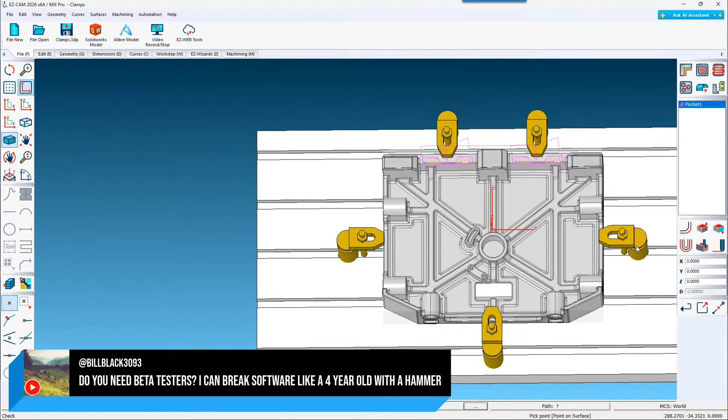That's Steve. It's a rule, minimum of one freeze per live stream. And how can you freeze when you're in Arizona? Great question, I think it might be Adam or Steve. You guys are much colder than me, so we're going to blame you. It's climate change.

Hey, all of it melted for at least a week or two. Now there's only like 3 or 4 inches of snow on the ground instead of 3 or 4 feet. Right, we have to talk about tacos every live stream. So yes, I was tempted to go get some tacos, but it came back too fast. Yeah, DoorDash, it's not fast enough.

I had one question, I don't know if I can find it, but it's about licensing. The guy has a computer in one room, a computer in the other room, and wants to be able to move between them without manually releasing the license. So there is a Flex license available. This is where I wish I had a sales guy on with me who handles the licenses day in, day out and all that stuff. But I'd say email hello@alibre.com and they could probably talk you through what a Flex license is. Both computers need to be on the internet, and I think there's a fee associated. But so Flex licensing is definitely an option.

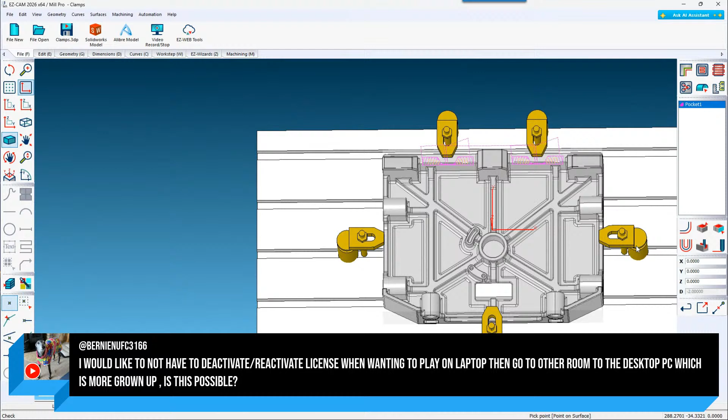Sorry, oh wait, I don't know if I'm... there we go, there you go. All right, there you go. That's the spirit, I think our viewership just went up because of my flexing. So there you go, yep.

Well, I hear you have the right to carry guns in Arizona, right? These guns are always legal. I'll tell you what, yeah, there you go. By the way, we'll blame Bill Black again for derailing this stream. It was the tacos that got us off the hook. Yes, but keep watching, Bill, we love it.

And can I just try and bring this back in? I want to highlight this. So, LGRFBS, Chris just showed us an amazing utility of EZ-CAM, but I think the question we started talking about was not about the EZ-CAM toolbox. I think the guy meant the tool libraries. Okay, my apologies, tool library. Well, I didn't get it as well in the beginning either, so let me bring in... I want to show something that's also very powerful in EZ-CAM.

If you can draw it, we can use it as an end mill. Oh, that's so cool, man! Oh yes. Oh man, you know what, I used to work with a client that did a lot of aluminum extrusion, milling and drilling, and it was always custom tools, always. So that's a big plus right there.

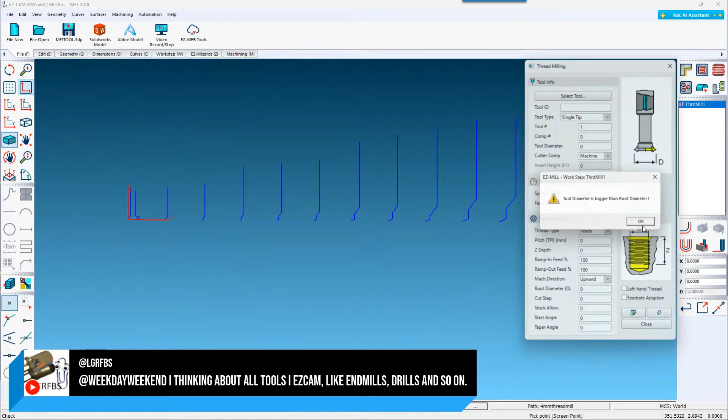To thread milling. And I think somebody brought up NPT. We also have the capability of adding a taper angle to our threading. Oh, that's so cool, so like a tap with a tapered tap, like for NPT? Yes. Well, the tapered tap is just like a drilled hole, it's just a tapping routine because you're feeding it straight down. Yeah, that's true, actually, yes it is. Yeah, but with a thread mill, I mean, we support different types of thread mill. Thread mill, yeah, cool.

So you have major types, I have a single tip. So I'm going to go in the background. Oh, I need to satisfy the chart here, let me just give it some fictitious values.

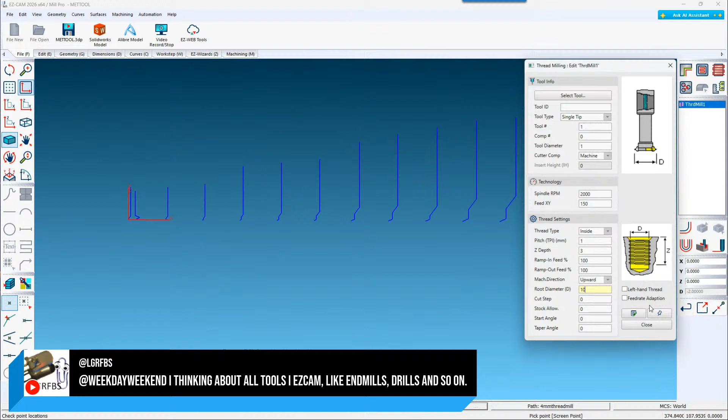1, depth 3, root diameter, I don't know, 23. That's actually going to be maybe 10. Okay, so if I go in my library, I'm all the way down to thread mill, it gives you a picture of your tool. So you know exactly what you're using. So you can set up tools out of the library.

Okay, can I ask now? I'm into my tunnel vision mode. Squirrel again. Really sorry, squirrel. Really sorry for that, Chris.

But when you make that custom tool, I imagine that you show in the simulation somehow that you may have made an overcut, cut into the model instead of just the material and so on and so forth. And does that still apply with the custom tools? Can you show that actually the shape of the tool interfered with the model in the simulation as well?

It's looking at it like an end mill. It's taking the outside diameter. So it does, but we do have what they call part compare. So if you're going to gouge your model, if it goes into the model, it'll actually show you. Let me finish up with the library thing, and then I'll show you the part compare. Yeah, sorry for that.

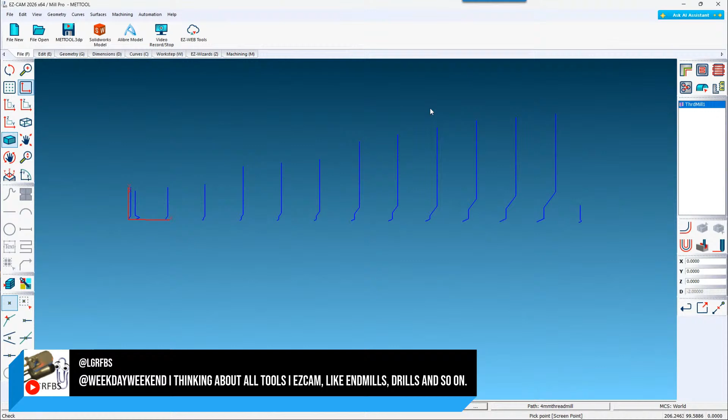Let me see. What do I want to get up here? So let's open this. All right, so we can go into the operation itself. You don't have to necessarily access it. You can access it on the fly. You go to select tool. Here's your tool library. You can pick a tool and load it.

Now, let's say I have 2 libraries and I don't want to carry over all the same tools, but I do have what I want listed. A lot of times what I'll do is I'll build a library with the tools I'm going to use, and they'll be available, so I'm not picking through all the different names. You can just highlight it, and just like Word, you can send it over to a library if I had an open library.

This is kind of related to libraries. Here's my 2 millimeter, or that's a 2-inch diameter. We're in inches. Let's say I make some changes here. I don't want to finish past my rapid 2 inches above. If I go to save as default, and I just say speed maybe. I go in to create another pocket.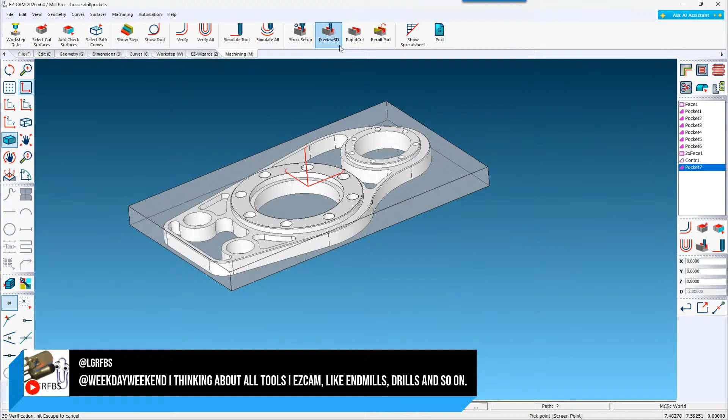Okay, yellow, I gouged the model. Yellow is a gouge, red is stock, green is, of course, to the correct size of the model. So I gouged this. Well, I don't know which operation that is, so I'm just going to double click on it. Oh, that's nice. Then I'll just test it. Okay, so this tool was too large.

Now, when you choose contour center line for a facing pass, if the tool is large enough, let's go with 5 inches. Let's see if that does what I want. Okay, so it's going to take a 5-inch cutter. It knows it's taking 1 pass. If my cutter is too small, back to 2 inches, and I verify, it knows that I'm trying to face this surface and the tool is too small, so it's going to give it the passes necessary to complete.

So let's go back to 5 inches. And you can change the angle. So if I go at 0 degrees, you're definitely going to violate it here. We'll go back to 90.

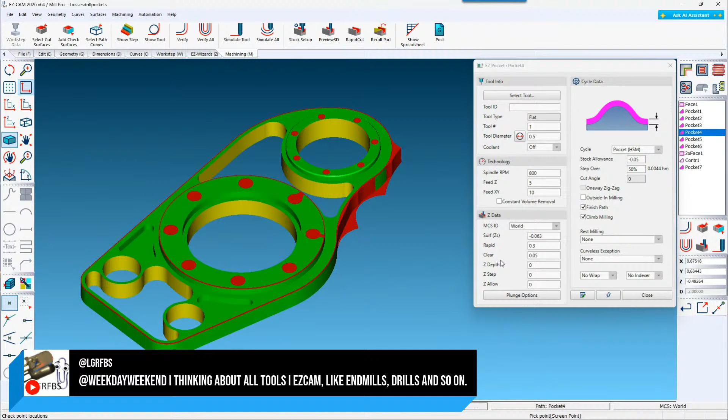Verify, maybe, yeah, verify it again. And now my surface is protected. So anytime I have a question about something, just double click on it. Now that's pocket 4 over here. That did that kind of work. So if I put in a negative stock allowance, there we go. There we go.

Not bad, huh? I love it when software tells you when you're going to screw something up in the real world. Exactly. Yes. You know what I loved about that demonstration? Okay, you see the colors, you know you gouged it. You double click it and it gives you the strategy. Oh man, I love that.

I love that. Because in very large parts, when you have maybe 14 or 15 different tools working on one operation, one setup, you need to really remember what's going on. And that little double click, that did it for me. I kind of like that one.

Absolutely. I have a question from a Facebook viewer. We love our Facebook folks. Is EZ-CAM Mill Pro what is labeled as EZ-Mill Pro on the Alibre website? I sent that to our website people just in case we need to do a rename on the website. But short answer is yes, they are the same. Great question.

Likewise, I saw one. Is it possible to switch to the Flex license from a normal one? Yes, it is. So, yep, same here. Pretty much. Oh, perfect.

There you go. We've got a lot in common, Chris. Thank God for that. We're brothers, Joseph. It looks like a match made in heaven. I'm telling you. Absolutely. And then Bill Black is going to do his best or worst to break the beta. So looking forward to your wrath of carnage and destruction.

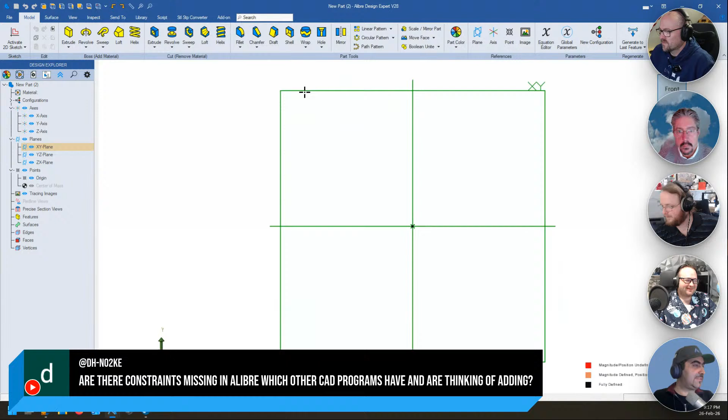So let's start a sketch, and it's going a bit slowly for me. There you go. And I'll get a spline going, just to get a curvy, weirdy shape. If I right click here, right? Let me see if I remember how to do that. Maybe I need to close the sketch. Oh, I was pretty sure you could do it. Why don't you? For some reason with the stream it's going very slowly. Actually, it seems like you cannot do that. You can export it as an SVG though.

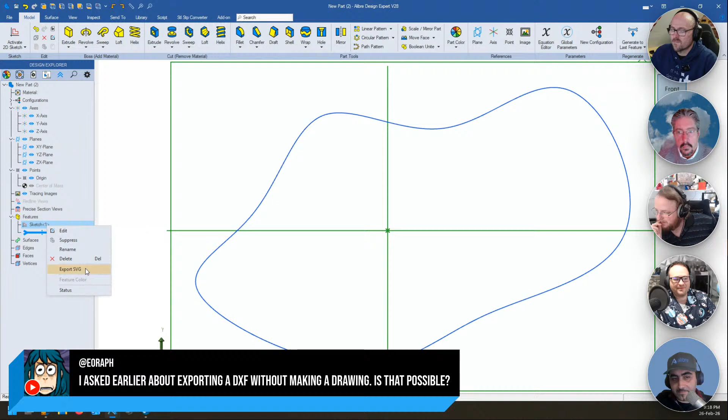Is there a step he's missing, Joseph? No, as far as I know, it's just drawings, but you can do SVGs for sketches. But usually, I think you can't do something and then Costas does it, so I didn't want to. Okay, let me. So I have an AutoCAD type software. It's an IntelliCAD clone, but I need to get the key. It's got a dongle key now, so I can't start it. I just wanted to see if I can copy directly from Alibre and it would paste it.

But yeah, other than that, you need to export it as an SVG, which can be taken through Inkscape and turned into a DXF from there. I mean, if you don't want the drawing, you export the SVG, you fire up Inkscape, open it up, save as DXF, you're off to the races. That's the only way I can think of right now. Perfect. And then I saw that comment from Karel Tops. Yep. Perfect.

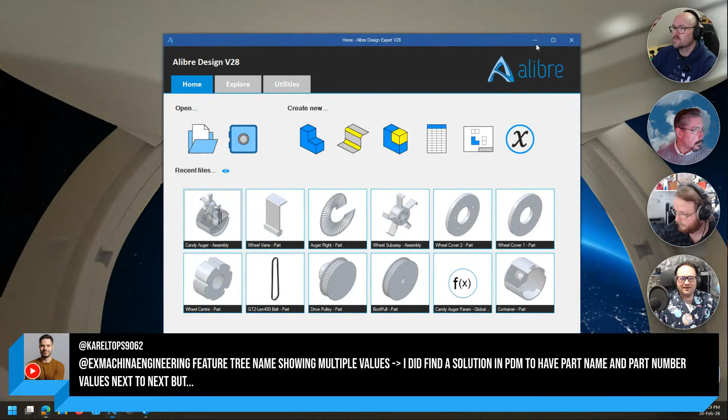Yep. Perfect. So big drama happened while you were doing that, Costas. I was completely circled and about to die when someone circled the one circling me, and then I got out of it. Well, natural selection is also based in lag sometimes, so there you go. Always a bigger fish out there. We got some more coming in here. I know, I'm trying to read comments and not die here.

You've got at Alibre LLC, sheet metal part cutting length. Flat pattern is first step of it. How to get the cut length value to calculate laser cutting length. How many meters does the laser need to cut? That's an interesting one. That's where I haven't touched. So I know why he's asking that, right? Because at a certain speed, you consume gas to run the laser. But I don't know if the measuring tool can help us there. If I select everything and measure.

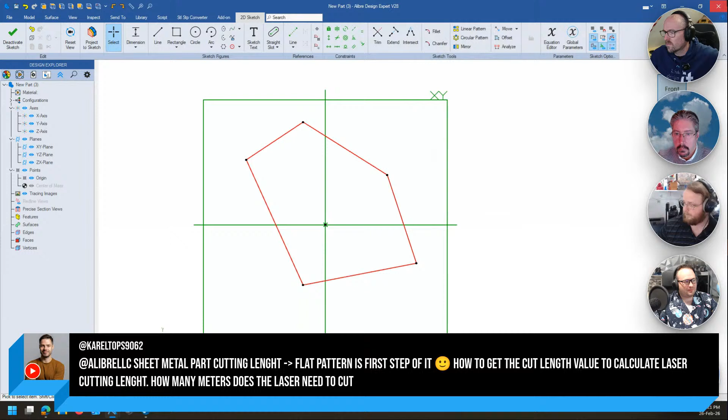Okay, so let's see if we can show your screen. Yeah. Okay. Oh, no, a chain. There you go. So if you look at this, I have my measure tool on. In the mode, I went to chain, and now I am clicking on a bunch of lines, and the total length is updating to give me that length, right? So I guess what you would do is you would just flat pattern your sheet metal. Actually, not flat pattern it. Let me get into a sheet metal part. You would unbend it basically, right?

Do I have a sheet metal part here? I don't. You would unbend it, and then you would create a sketch. Let's do one quickly. You have to do it from a sketch. You can't do it from the edges of the model. Yeah, that's the thing. So if I make this a contour flange, then I unbend it. This is my fixed face. I select all other bends. Now, if I create a sketch. Frozen on the screen for Costas's screen share?

No, not for me. I'm not seeing what he's doing. You're minimizing and maximizing the file selection. So I'm not seeing Alibre itself open other than the launcher. Yeah, are you sharing? Oh, thank you, Adam. Wrong screen. Yes. So there you go. That was all on me.

So what you can do here is you can project to sketch, and you go ahead and you select everything, right?

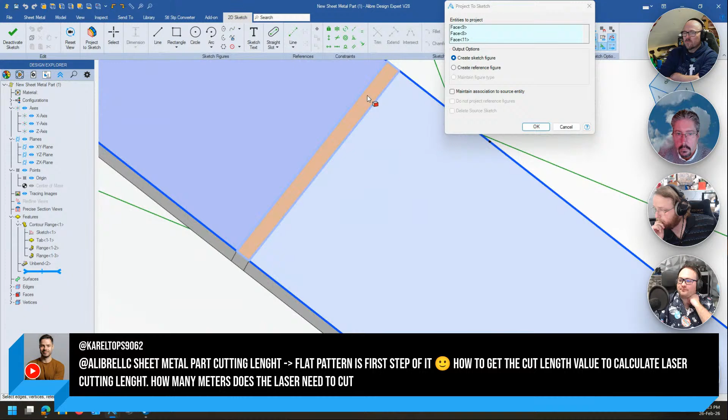Thing is, you need to select these little bent tabs. But now you can. Well, let me see if I can make this a bit more efficient. If I right select, right? Do I need to do that? No, I need to select these two, delete them. Select these bends, delete them, but I still get these side little bends.

And then I open up my measure tool, chains. I right click on one, chain select, and that is the total distance. Right? But the drawback here is that you can only do that for continuous shapes. So you do that for the outside, but if you have 3 or 4 pockets for the inside, you need to do each one separately and keep the measurement somewhere and add them up.

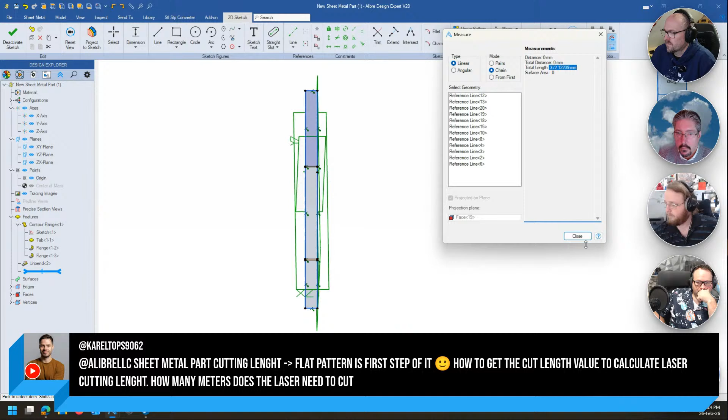I guess you could write a script to do this. But yeah, measure chain mode, and then you will get the total length of all of your selections, and that's how you do that. I hope that helped.

I like this one from, I think it's GreenPlasticWaterCan. Are there tactics for very large assemblies? Think fully designed motorcycle or mobile machine. I can pull that up on my screen. I have an example. Now you may notice a slight difference in the user interface. Not sure where that comes from. Surprise, V29. Yes, I had this assembly, and very early on I accidentally saved it in V29 and couldn't go back.

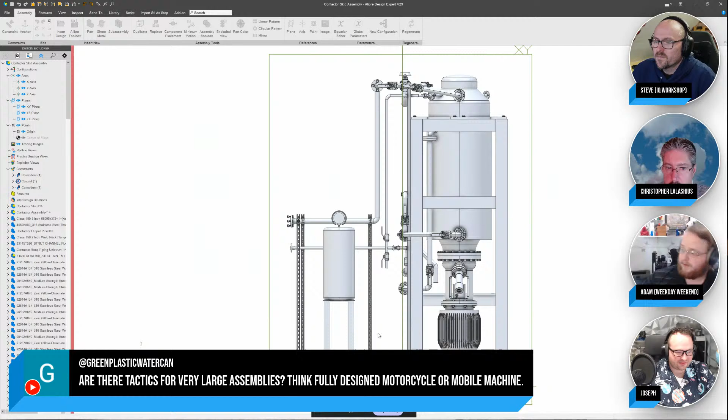So one of my favorite tactics for very large assemblies is we can break these down into sub-assemblies. So I can choose edit in a separate window, and then all of a sudden I've got a sub-assembly that really is a lot easier to deal with. This is so large that it's going to take a moment. Even all the threads in this are actually threaded with physical threads, so this is kind of heavy. Well, I guess that's the point of the question. But I can pull this up in a window, and then I have a sub-assembly for the things inside of this one, and being able to break it down into smaller pieces can increase performance and let you work on things.

So that would have been a black panel of death in Fusion right there. Oh, really? Oh, yeah. It's so annoying, man. Yeah, you don't need physical threads, but McMaster-Carr gives you the best of the best, so...

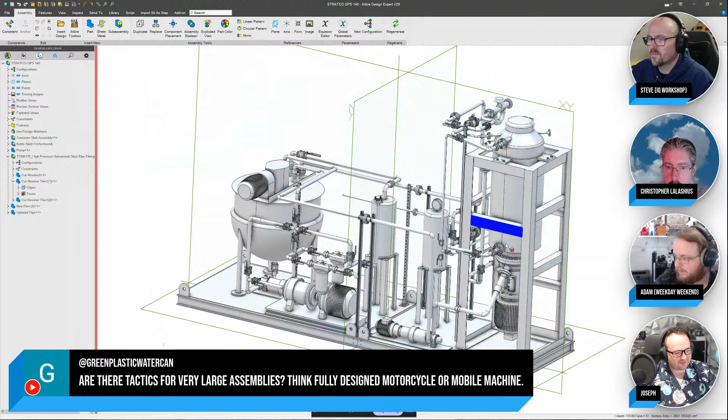So, in other words, break it down into sub-assemblies. That's my favorite tactic. That's always a best practice. Yeah, for sure. And so you can just kind of go down the nest until we get to our raw components. And even from a top level assembly, I can still easily take something from a sub-assembly and just edit that one component in the context of the assembly still. Okay.

Here's a good question, I think, for you, Chris. Does the raw stock methodology shown work in EZ-Mill Express? And by the way, GreenPlasticWaterCan, let me know if that answers your question or if there's any follow-ups. But what do you think of that, Chris? Oh yeah, absolutely. Everything I showed you about creating custom curves, creating solid models, whether it be in Alibre or if you have an existing STL. It has to be an STL model if you're going to use them as fixtures and clamps. But EZ-Mill Express supports it.

Gotcha. Nice. Along with multiple stocks as well. So that and multiple fixtures. So you have your G54, G55, and so on. I think it's E1, E2, and so you have a base fixture, and it just gives you the programs that have all the fixture offsets included. So if you have multiple vices, multiple stocks, that's available. Perfect.

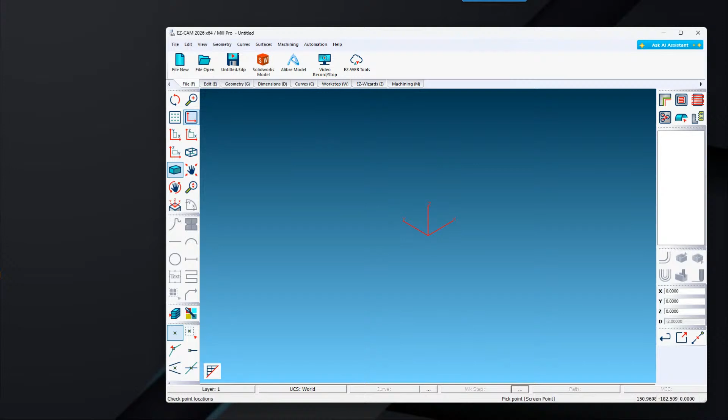It's better, which I found. Thank you. Use measurement tool, chain selected surfaces. Wasn't accurate, but best I found.